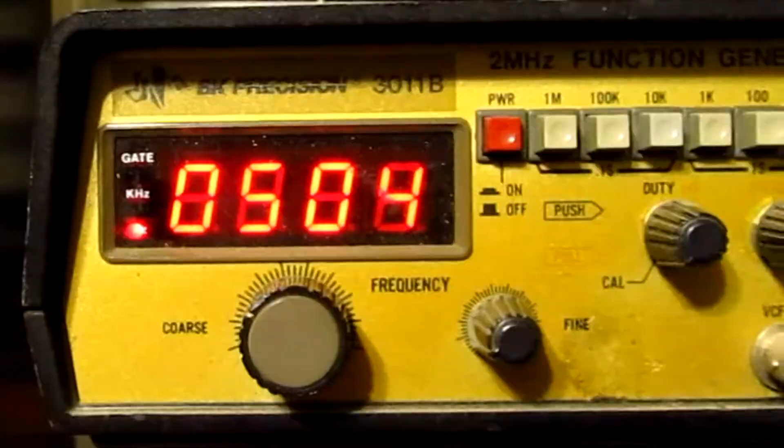I've been playing around with the Oculus for quite a while now, and there's a program I bought a long time ago called Gravity Sketch. Haven't really used it much because at the time it was a rudimentary sketching program. I went in there the other day to try it out, and they've made a lot of changes to it. So let me jump into VR and show you what's going on. I think it's pretty cool.

So I'll start up the program, and then the first thing I want to do is record a video. So now I'm recording a video. Okay, you guys should see everything, and I'll pull this over.

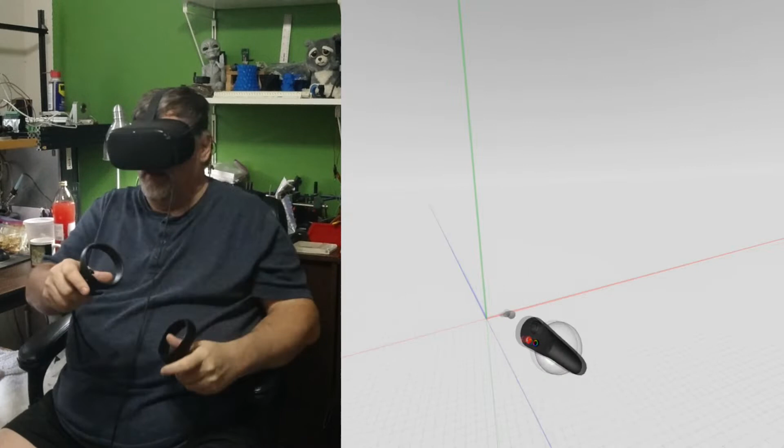This is my menu, so I can rotate it around and pick things I've already created, but I'm going to go ahead and tell it to start a new sketch. Now when I start a new sketch, what I can do is bring this up. And what you're seeing is the X, the Y, and the Z axis.

So I can sit there and create things around these axes. And I can click on this and I've got different menus I can go into and do all kinds of things. So I just want to show you one of the tools.

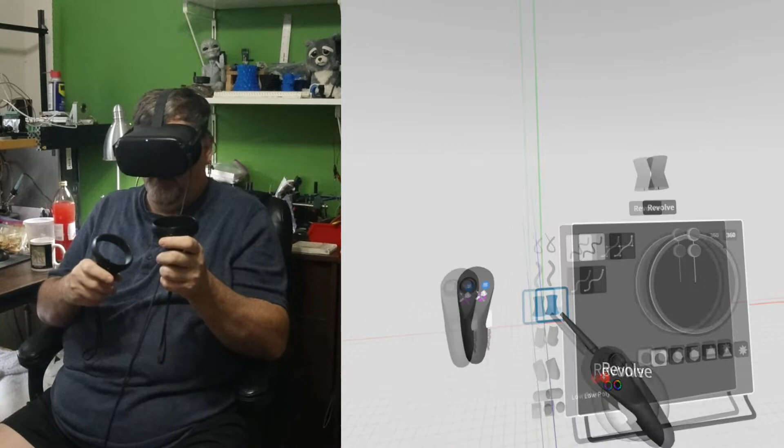It's called the Revolve tool, and I'm going to click on that here. When I do, I also get this menu with different things I can do. So you can see right now it's set to revolve this way. I don't want to do that, I want to revolve this way. And I'm sure there's a way of locking the axes exactly on center, but I haven't figured it out yet.

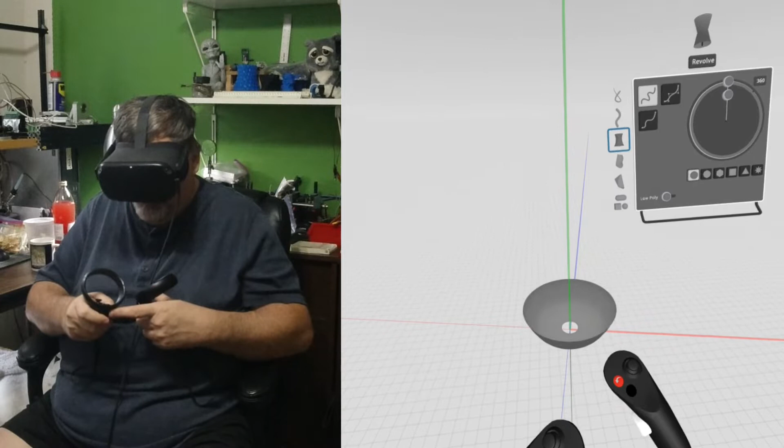But anyway, I'm going to come in here and just do something very simple. I'm going to go like this, and create a simple shape for a vase, all right? Nothing fancy.

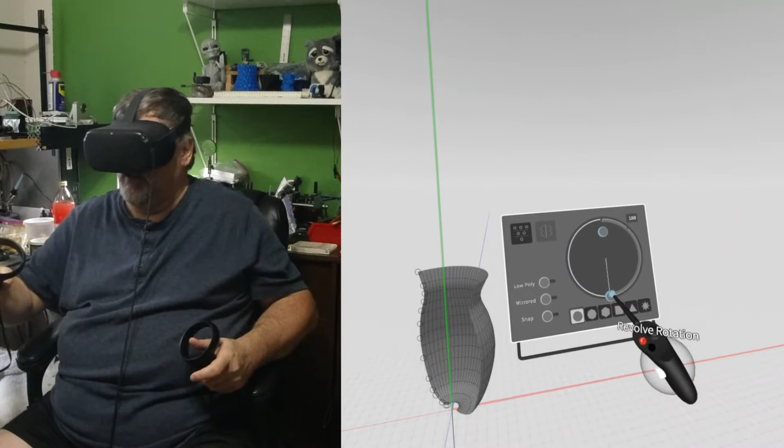But here's the cool thing about it. I can take this, grab it and hit this button, and that puts me into a menu program. The first thing I can do is go like this, and now you see we're looking at a half of it. I can expand it up, and if I want to make changes, I can take this, for example, and move it around. I can flatten it out. I can do a couple different things.

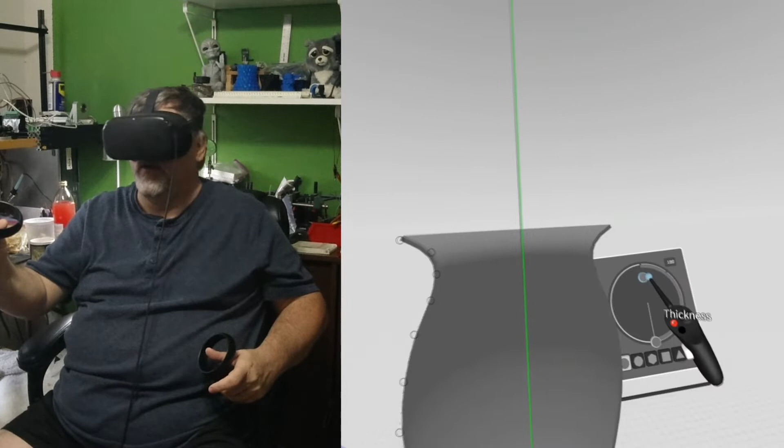I can make the material as thick as I want, and I'm going to make it about that thick, which is probably a little overkill, but you'll see why later. And I can bring this in like this.

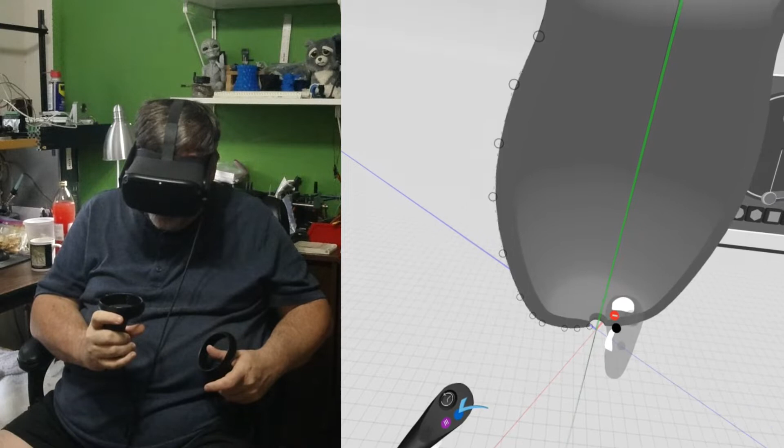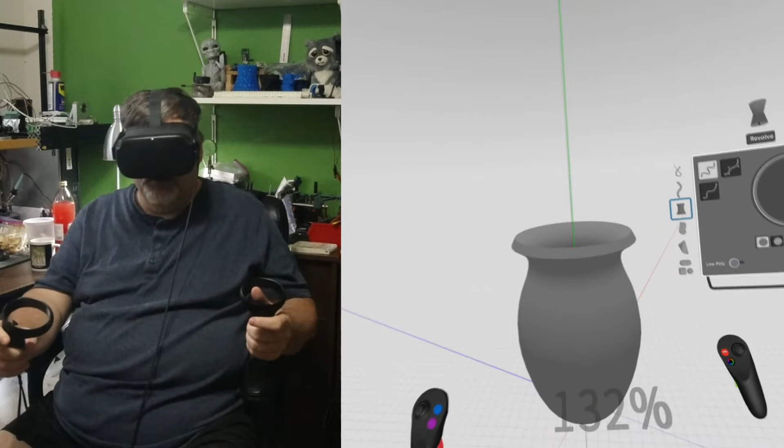So then I can go and hit this, which is a stroke tool, and it allows you to do different things. So what I can do is also turn on a mirror. All right, so now you see there's a ghost of this. So whatever I do on this side will occur on that side.

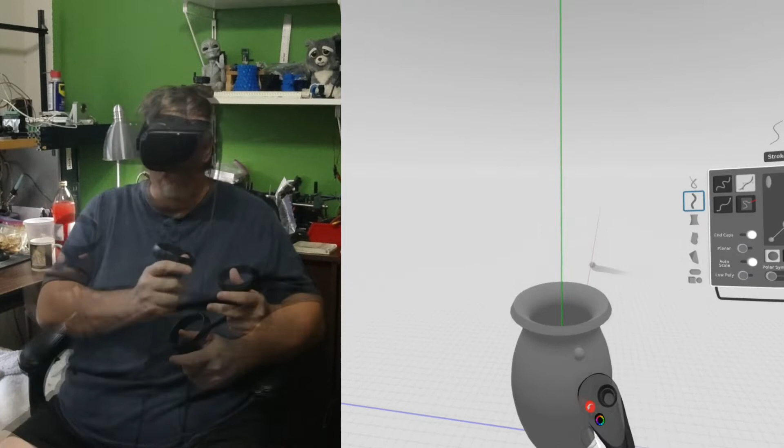Yeah, right about here, that should be good. So I'm going to say, fine, I want you to go from here to here to here and to there. All right, good enough for now.

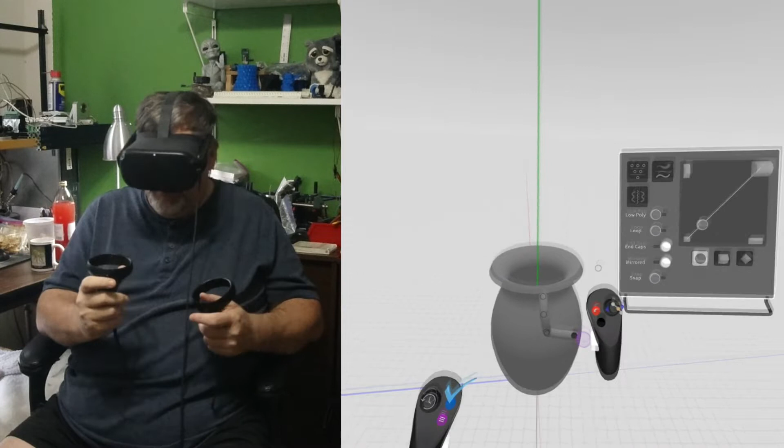So now what I'm going to do is grab it and hit the edit button, right, and set these things straight, kind of straighten them out. Now, if there's a point I don't want, I can delete that point. And so you see now I've got these shapes.

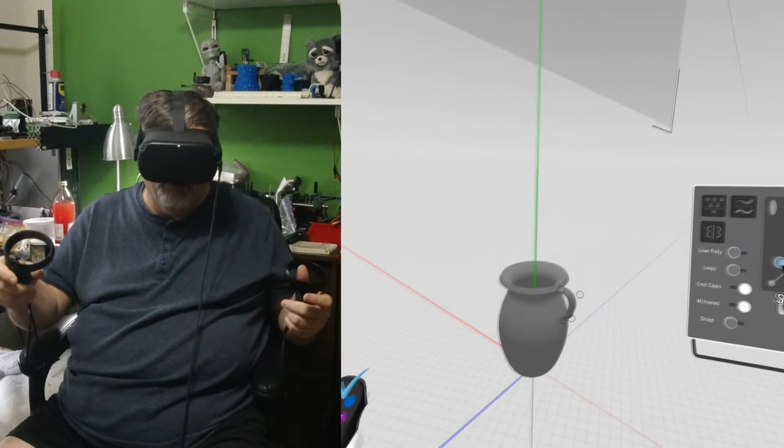I can pull this out like this, right, get this nice shape going on like that. That looks pretty good. And then I can actually change, make it thicker or thinner, and change it, make it wider or narrower or whatever. So I'm going to go a little bit thicker, go a little bit more to the narrowed side of things, right? Straighten it out, just a tweak.

Yeah, that looks pretty good, I think. I don't want to take a lot of time on this, but I just want to give you an idea. I'll make it just a little bit thicker, a little bit more robust.

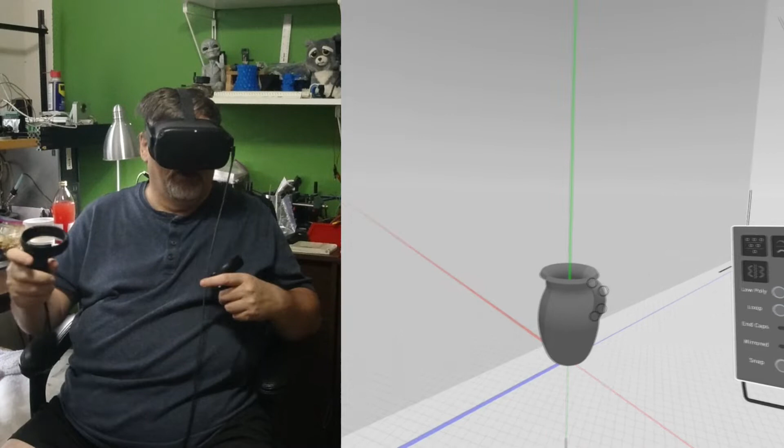So now we've got these nice little handles on there. What I can do is hit this, go to my regular menu, and turn the mirror off. I don't need that. I've also got things like snap and other things, but I'll show you that later.

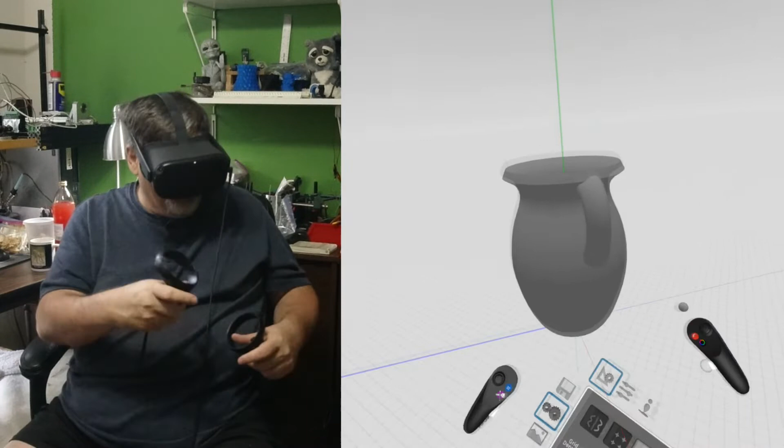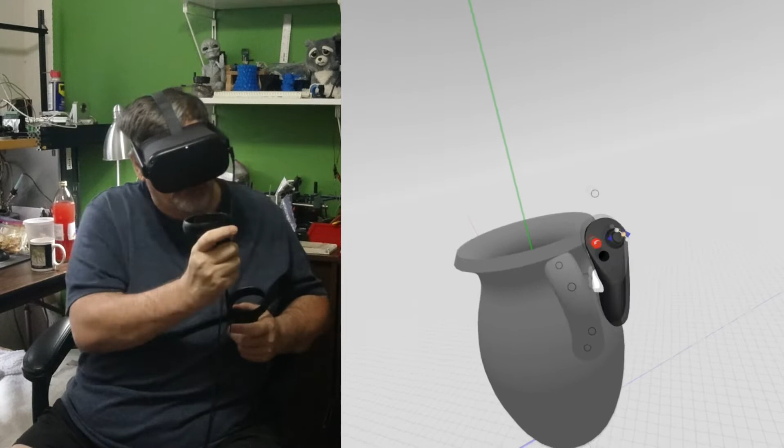So here's this nice little vase we just created. Did not take me very long at all. Actually, I do want to bring that down just a tad. Just a tad. Yeah, it's good, and it's a little bit tweaked, but there we go. Don't want to be too much of a perfectionist, but it was a little tweaked out there.

Yeah, that's good. Undo that, and I'm just going to manually straighten it out. Yeah, there you go. That suits my sense of proportion a little bit better. All right, so there we've got it.

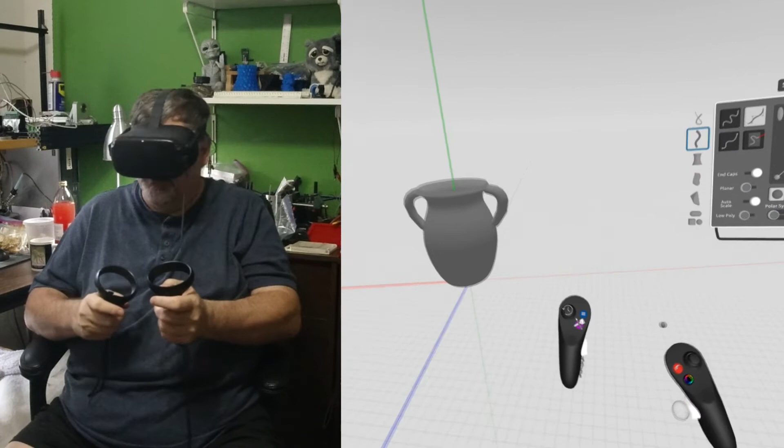And what's the big deal with this? What am I so excited about? Well, I've always been able to click this and save it. So I can save this thing here and call it whatever. Just need to tap it. So anyway, we'll say V-A-S-E. There we go. Now if I sweep, I get these other tools.

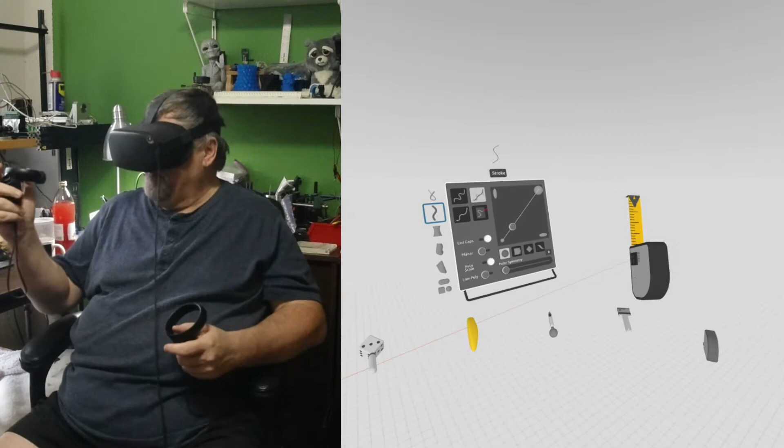I can do things like get a measurement of how tall it is, that kind of stuff. But anyway, so we've got the thing there. It's been named and it's been saved.

Well, the other cool thing I can do once it's been named is hit this, which is export. And the cool thing about that is I can go save to the cloud, export. It comes up as an OBJ model. Set it for double-sided, all that good stuff, and boom. It asks what do you want to save it as. I got a banana sticking in my keyboard. Vase works for me. I go like that, and this whole thing has now been exported to the PC.

So now we'll jump into the PC and I'll show you what can happen there.

All right, so we've exported the file. Now what I'm going to do is go into my Quest folder, and there is my vase. The next thing I'll do is click on it, tell it I want to download it, and save the file. I've got this set up for 3D file, so I'll save it. And now it's saved. Let's see what we can do with it.

Alright, so here's the vase. We'll go in here and tell it to extract all the files. And so it's extracted them, and you see I've got a vase OBJ.

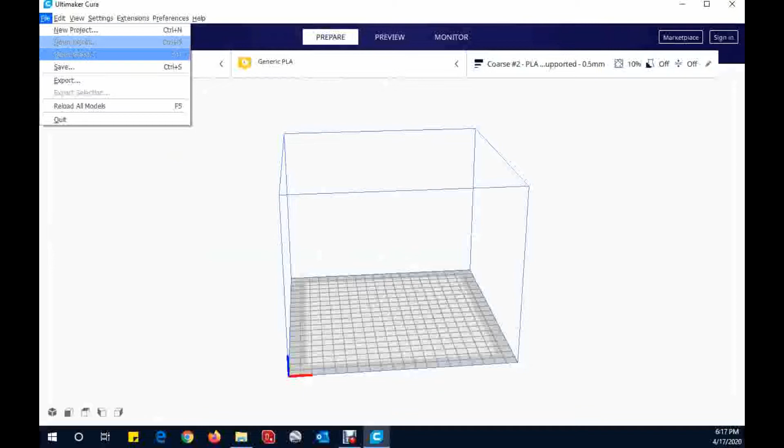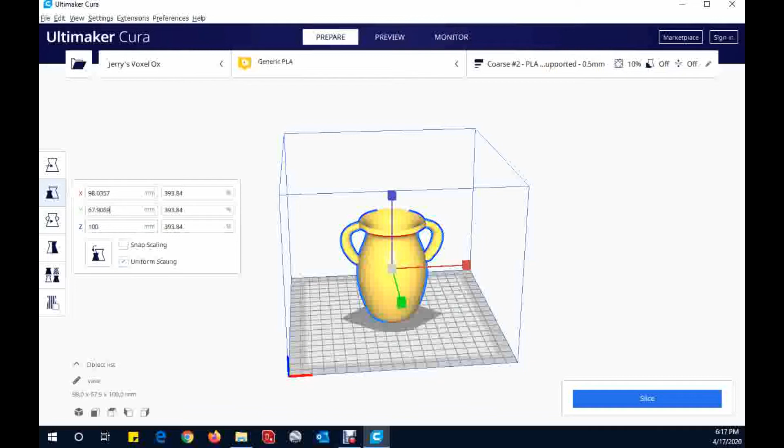Now the reason I'm excited about that is we can go into Cura. I can tell it to open a file, and hey, there's a vase. Let's open it. Looks just like the one I made. Come in here to scale, and let's make it 100 millimeters tall. That's almost 4 inches, right about 4 inches. That should be good. And so now we've got this nice big vase here.

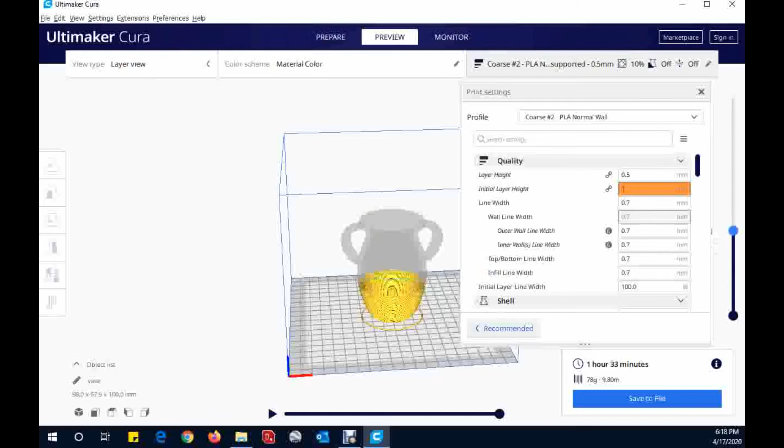So I'm going to select my setting for PLA, normal wall, and I'm going to tell it to slice it. All right, so now it's been sliced, and I go to preview, and we can see that it's going to print this thing out. It says it'll take about 1 hour and 33 minutes, so I'll save it to a file and see what happens.

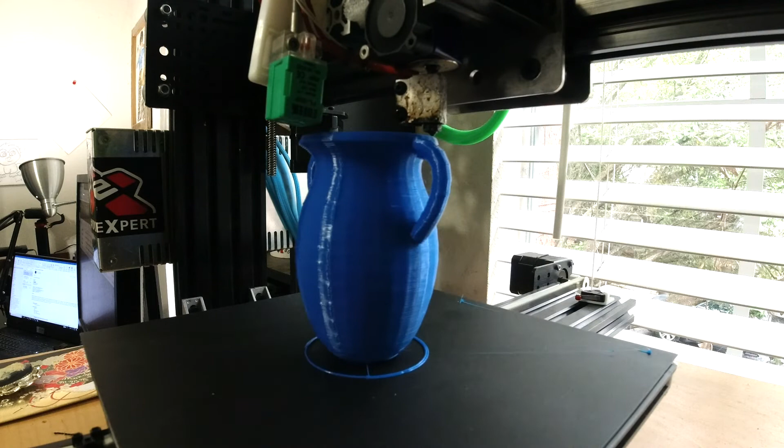So how cool is that? You can sit down in the virtual world and design an object, and then bring it into the physical world. I don't know, maybe I'm just old, and so therefore I'm impressed by modern technology, but I just think that is cool. That is just awesome to be able to do that. So, yay!